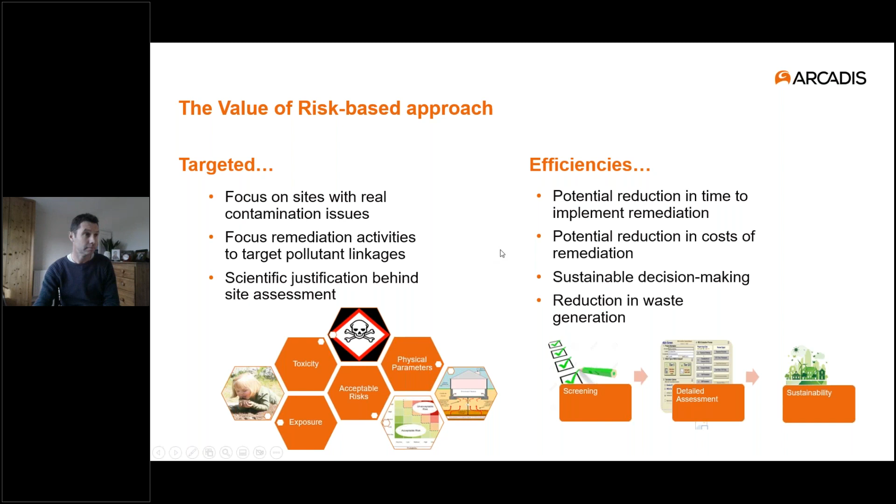I wanted to look now in a bit more detail at the risk assessment element of the process. So this determines the need for action, but also the pollutant linkages of concern for what action needs to be taken. It's an iterative process where we continually refine the conceptual site model. Sites may be screened out at any stage of the assessment process.

So the first stage is desk study, where we identify whether or not a contaminative source is present. We then move on to site investigation if the site was of sufficient concern. This may be where we take soil and groundwater data. The data we collect would be initially screened against generic assessment criteria, and that enables us to screen out the low risk sites.

For sites then requiring further assessment, we move on to the more detailed assessment stage, and sites coming out of that requiring more work, that is where we consider remedial options. With the risk assessment process, we would be targeting the pollutant linkages specifically in those remedial options. But there's always a case for considering the sustainability of any action to be taken, and then potentially to undertake further assessment to fully justify the remedial action.

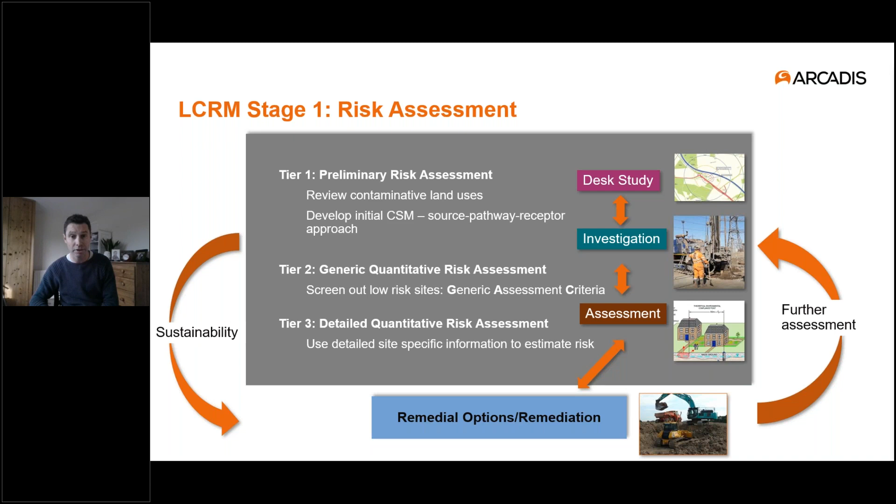So just moving on to the conceptual site model fundamentals. So the conceptual site model, also referred to as a source pathway receptor approach. So the first part obviously is a source, where we need to have a contaminant that has potential to cause harm. Then we have a pathway, which is a mechanism by which the contaminant can reach the receptor, and then a receptor, which is something that can be harmed by the contaminant. For a risk to be realized, all three elements need to be present.

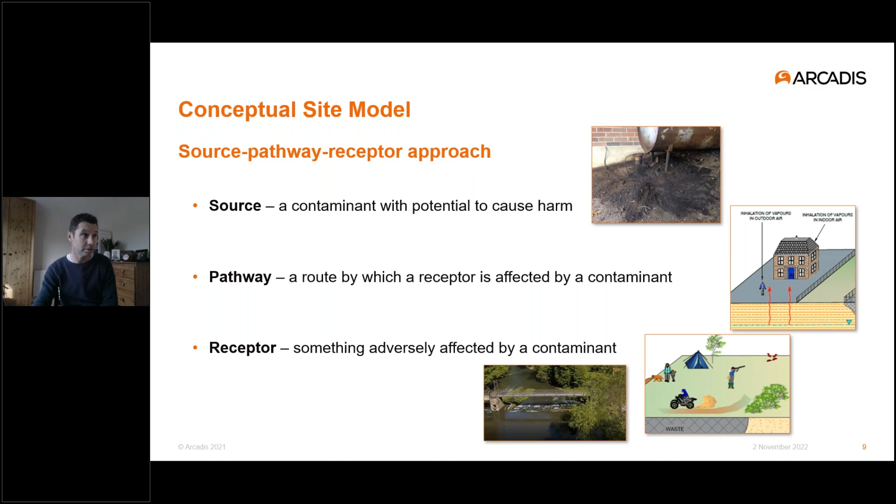So just have some examples of different sources here. A thing I wanted to talk about is the difference between point sources. It tends to be point sources that we identify in desk studies, but we also would have more diffuse sources. So something like pesticides, for example, widespread usage, so it could be considered a contaminant. However, if they're applied properly, they should degrade in the environment. So it would be more the point sources that we consider, so something like mixing points or storage areas.

Other examples of point sources we have here: fuel tank, animal waste storage. Buildings can be sources of contamination. So we'll be talking about asbestos in more detail later, and lead paint. We also have diffuse sources that could come from natural background in soils, also from human activities like burning of fossil fuels. Background issues are harder to deal with because often the benefit is less likely to be realised.

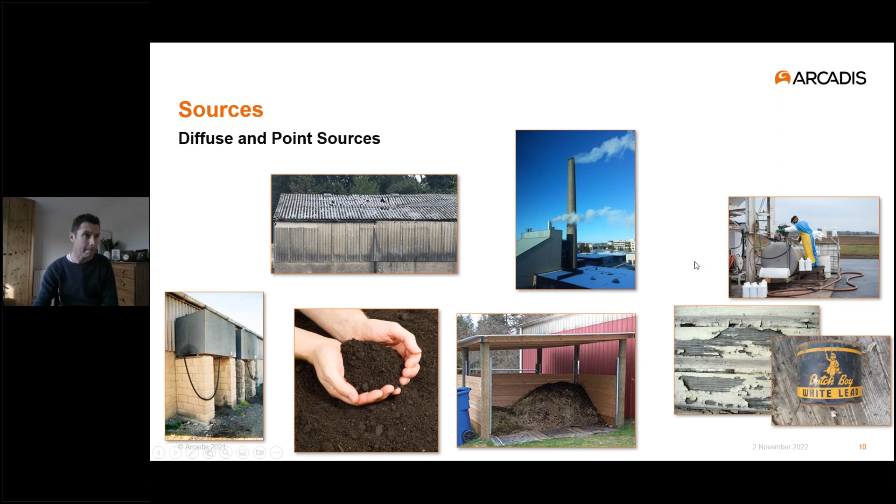Okay, and moving on to receptors. So there are three broad categories of receptors that we consider. So first of all, human health. Different end uses, different scenarios determine the type of receptor and the sensitivity. So for example, in a residential scenario, we may consider a child receptor, whereas a commercial setting may be an adult worker. Water resources. So this is where we consider aquifer resources, so that would be for drinking water or as a base flow for surface water. And also surface water, which would be either an ecological resource or drinking water.

And finally, ecological receptors. Now these tend to fall within water resource because it's often the water environment that's being affected. We tend to specifically consider it when it's designated sites. It would be a different scenario if the protected site was within our site. So then we might need to consider the soil quality.

So just to call out some of the human health exposure pathways. So these are the mechanisms by which harm can occur to people. The active pathways depend upon the scenarios or end uses for the site. Some pathways will be more important than others, and this depends on the end use scenario. So broadly speaking, the pathways we consider are dust inhalation and ingestion, vapor inhalation, dermal contact with soils, and consumption of produce.

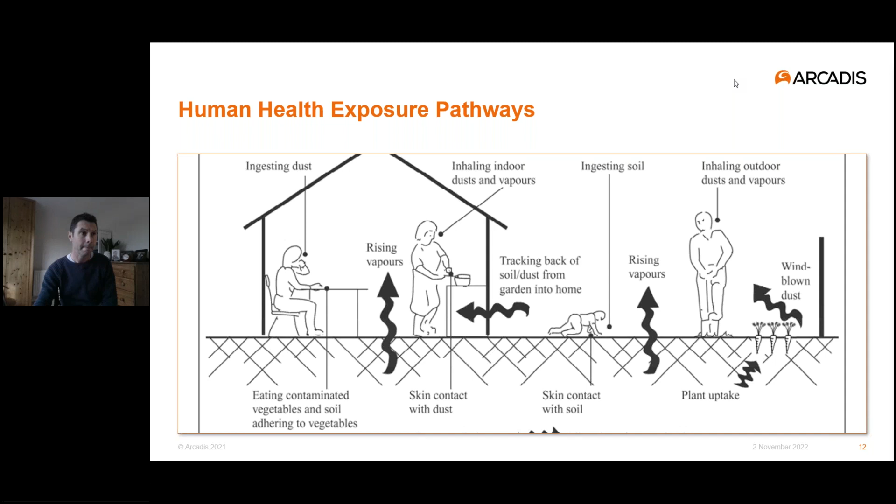Next, the pathways affecting water resource and ecology. So contaminated soil may leach into the aquifer. When an aquifer is then impacted, the contamination within the aquifer can laterally migrate towards surface water. Another pathway to consider would be direct runoff into a surface water feature. So these pathways will also be relevant to ecological receptors. Less commonly, we may have a situation like this shown, where we have deposition of waste material onto designated sites. So here we have a landfill that was being eroded onto a protected shoreline.

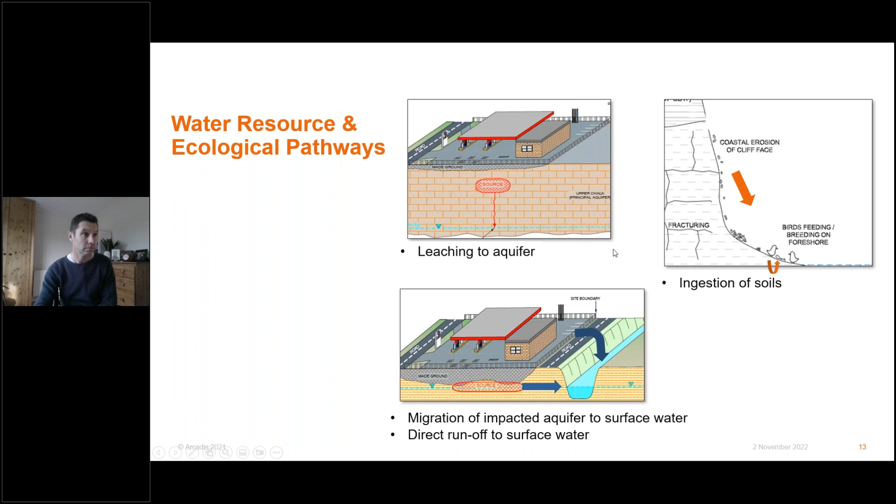Okay, so now we're moving on to look at some contaminants in more specific detail. So first of all, I thought it was useful to introduce some of the concepts of how contamination is held within soils. So contaminants may be associated with the organic matter within soils. They may be held dissolved within pore water, or they may be present as particulates. So metals and organic compounds are typically bound in quite different ways.

So how a contaminant is present in soil really depends on just how it got there. So something like a historical fuel leak may have been held within the soil matrix, whereas fragments from asbestos or from lead-based paint would be more dispersed as fragments throughout the soil.

Another thing to think about is just how the contaminant is dispersed across the site. So we may have an airborne source or a spill, and that would be a point source, and then lower concentrations coming out in a plume. But if we were dealing with an imported soil to the site, then we wouldn't see this effect, and it would potentially be more evenly distributed across the site.

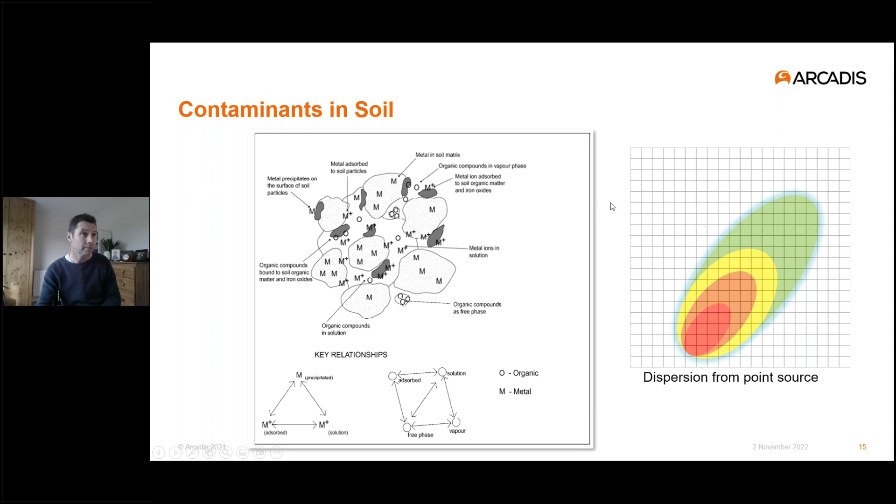So moving on to some examples. First of all, I wanted to talk about metals and the common example of lead. So lead has many industrial uses and sources. It is known to have effects on human health, including brain damage, and also ecotoxic effects. So in terms of sources, many metals, including lead, can accumulate from activities such as burning of materials or sewage sludge.

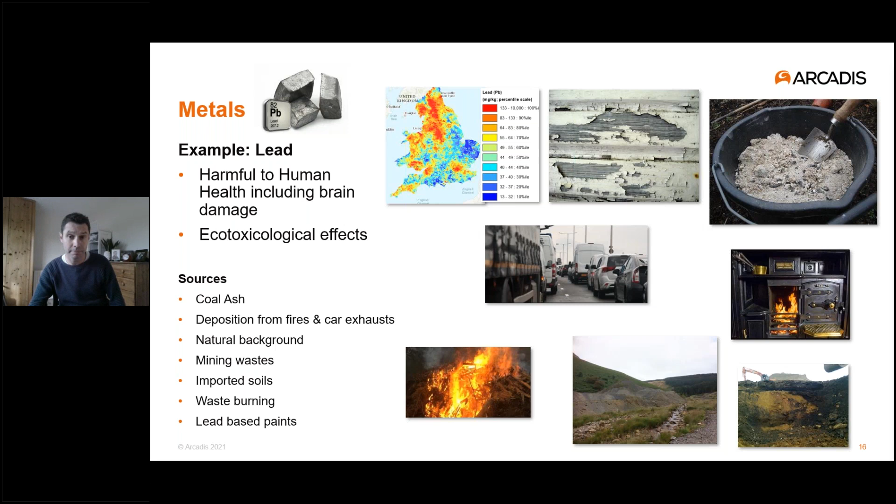I gave the example before of the point sources, so maybe lead-based paints. We may have airborne contamination from burning that could be dispersed over a large area, or more recently from traffic. Lead in particular, we have some areas of the country with particularly high background concentrations that may be above regional screening criteria. And of course, we always have the potential for imported nasties on site in reused soils.

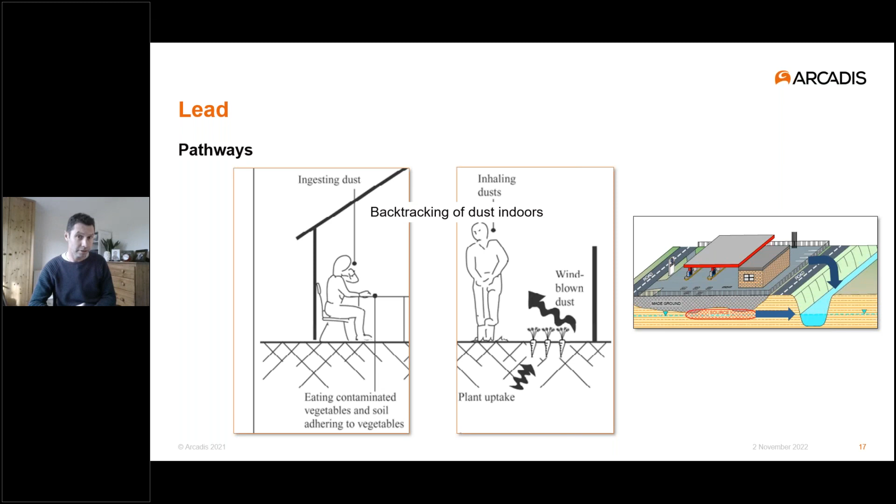So in terms of the pathways for lead and other metals, because it's not volatile, we're just considering the dust and dermal pathways and potentially getting into homegrown produce. So it's worth noting that there'll be no pathway present if the soil was covered. In terms of risk to water resources, there's a potential for leaching. This depends on the mobility of the species. And something like lead is often of quite low mobility, particularly something like the paint fragments example.

Next, I wanted to talk about hydrocarbons, and specifically polycyclic aromatic hydrocarbons, as they're very common and ubiquitous, associated with many human activities such as burning. Various sources, so from oils, from combustion products. We also have background concentrations relating to human activities. So these will typically be higher in urban and industrial settings, but we also have concentrations in agricultural settings from burning activities that occur there.

There are many hidden sources from our industrial past. So things like blacksmiths, hop kilns, lime kilns were widespread throughout the country. These could be point sources, but often we have reuse of the ash material associated with the burning, things like paths, fill material, or even added to soil. So PAHs can really get spread around, and again, are imported in soils to sites.

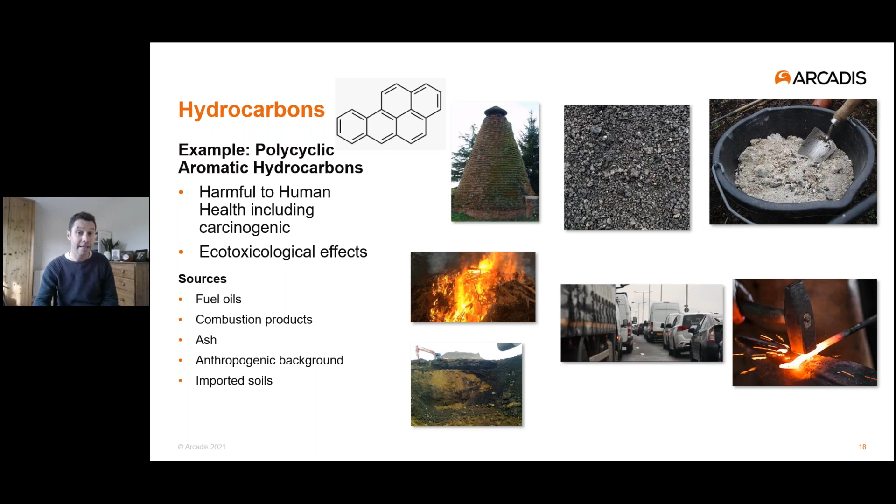In terms of pathways, it's similar to lead, but some PAHs also have some volatility, so the vapour pathway may also be active. They generally have very low environmental quality standards. So when we're assessing risk to water, we might want to think about general background quality as well.

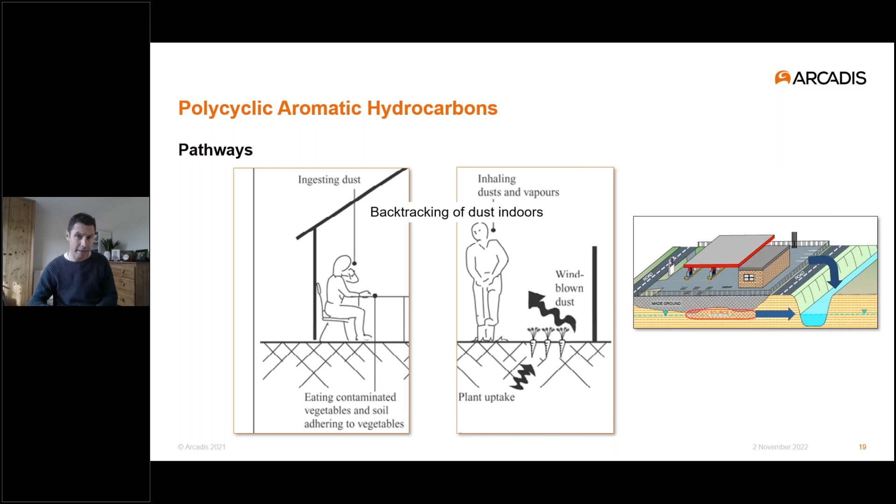Right, finally, moving on to asbestos. So asbestos, as you probably know, is something that's been heavily used during the 20th century. Final forms of asbestos were not banned until 1999. So it's quite widespread. Its properties of being fireproof and the fact that it doesn't rot have always made it an attractive building material. So asbestos is harmful to human health and it causes respiratory diseases.

I have some examples here of where asbestos may occur. So particularly building materials and insulation. Release from building materials would often be during demolition or maybe deterioration of those materials during weathering. Now, some asbestos-containing materials have a much higher potential to release fibres than others.

So some of the examples I have here, we've got asbestos floor tiles in the top right, a relatively low percentage of asbestos which is highly bound, and then below that we have a loose fibre fill, so there's a high fibre release, and somewhere between those we have the cement-bound asbestos form that we so commonly see. So again, with asbestos, there are often low background levels which are associated with human activities.

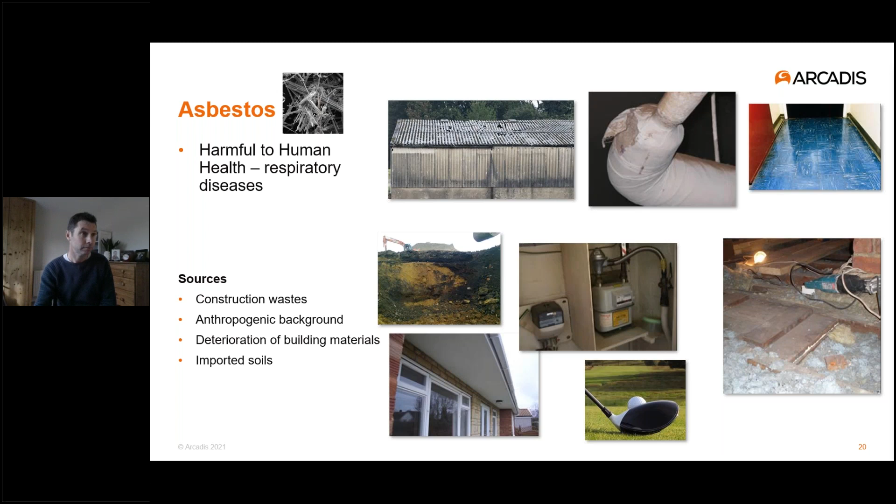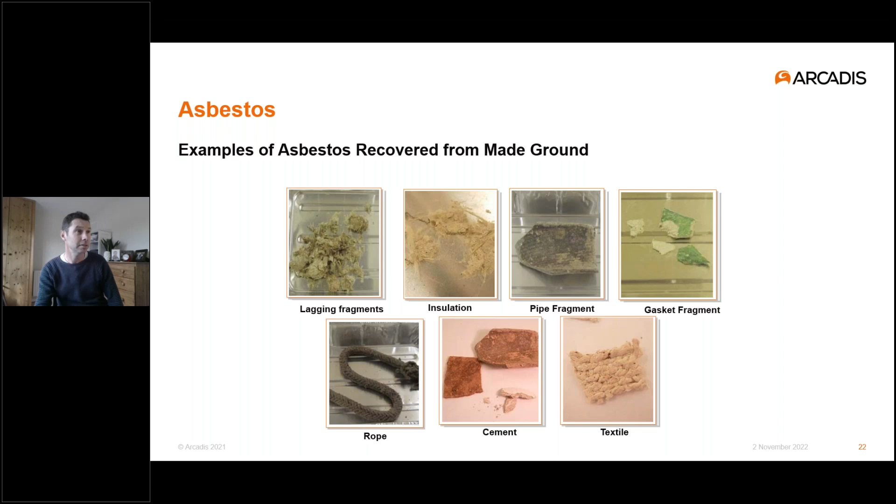So as far as exposure pathways go, it is only the inhalation of dust or ingestion of dust pathways that are relevant to asbestos. Here's some examples of where asbestos has been recovered from soils. So many different forms can be found. When an environmental consultant is assessing a site, we would identify suspected asbestos, and it would be confirmed by a specialist or laboratory.

I just wanted to give an overview of some of the mechanisms for asbestos release from soil. So in order for a risk to human health to be realised, asbestos fibres need to be airborne so that they can be inhaled. So if we're dealing with wet or clay soils, then the release potential from activities like wind disturbance or mechanical disturbance are much lower. However, for indoor risk, potentially wet and clay soils could stick to your shoes and get inside much more easily. So factors affecting the indoor pathway could be very much related to things like distance between the source and the property, and habits like whether you take your shoes off or how much you vacuum.

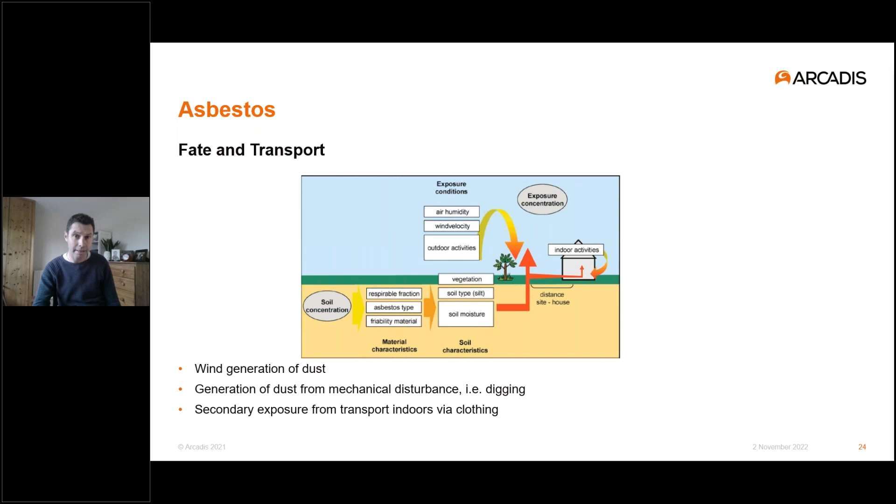Okay, so just to wrap things up, we've identified that there are many sources of contaminants that can be widespread in their presence, and they have the potential to cause harm. We've looked at a few of them in more detail. However, we know that we have a risk-based framework, and using screening tools like screening criteria that can help us to manage the risk and take appropriate action. For potentially contaminated sites, an environmental consultancy can help assess the risks and determine what action needs to be done and what the most appropriate action is.

So for example, a site may have contamination, but it may not need to be remediated. We may not need to remediate the entire site, and we may only need to consider specific pollutant linkages of concern. So I haven't covered remediation here as a topic specifically. It's a very wide-ranging topic. For us, I think there's interesting implications with soil quality. So following remediation, how much of a resource value could remain for a soil. So hopefully there'll be some interesting synergies there.

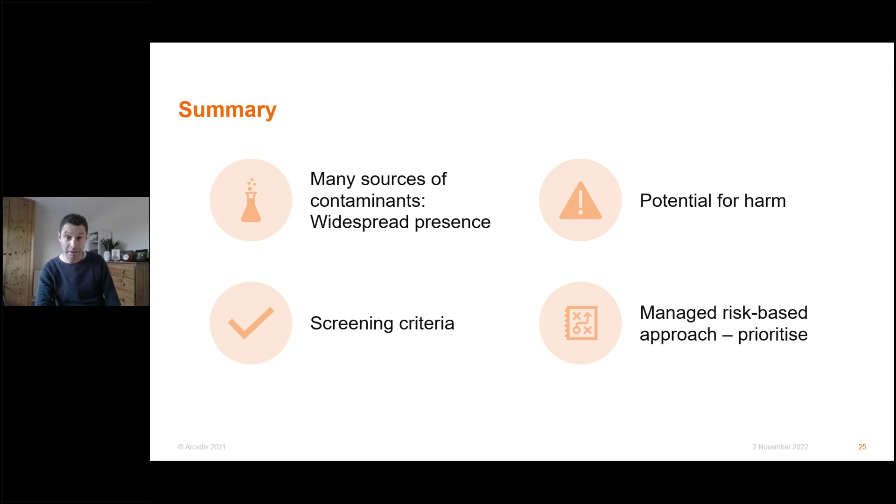And our next speaker will be Stewart Powell. So Stewart Powell started working with asbestos in 1999 as a technical manager for a licensed asbestos removal contractor with responsibilities including health, safety and quality. He's currently the head of compliance for John F. Hunt Environmental and part of the SHEQ team that advises and supports a national multi-service subcontractor that employs over 1,500 personnel. Other responsibilities include developing standard operating procedures for all asbestos-related activities, audit schemes, and training courses for the safe removal and disposal of asbestos. In recent months, after a HSE asbestos licensing review, he was able to secure a 3-year extension to the current HSE licence.

Stewart is also the current chairman of the SHEQ Asbestos Working Group, which helps support over 100 health and safety professionals that work with asbestos. He's been a frequent speaker for the HSE Working Well Together campaign and the UK trade and industry for all subjects relating to safe management, removal and disposal of asbestos. Stewart is the author of aspirational guidance notes and handbooks for the asbestos removal industry best practice. So over to you, Stewart.

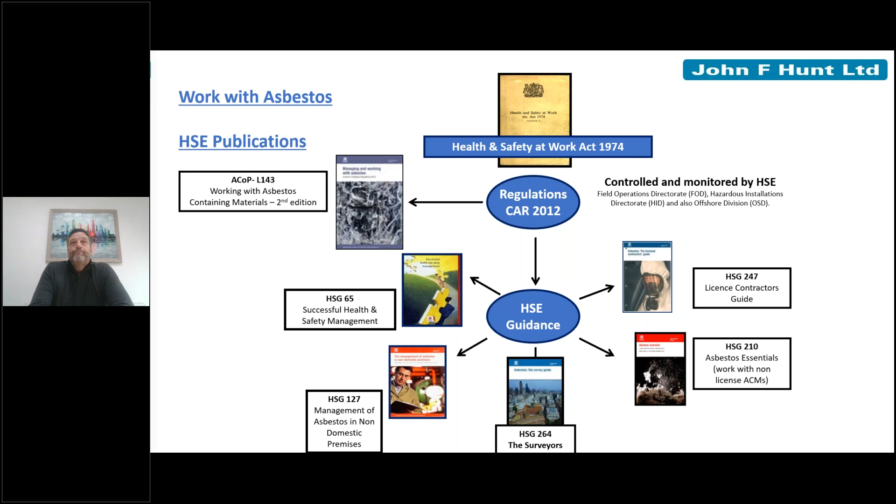So back to the Control of Asbestos Regulations and the control limits. As I mentioned before, any work which is likely to exceed 0.1 would automatically become licensable. So licensable asbestos removal, including contaminated in the ground, the materials would really consist of spray coatings, laggings, gaskets, generally insulation materials. So we're strictly bound by the HSE to notify work 14 days before it's likely to be undertaken. And the purpose behind this is so the HSE can monitor work which represents the greatest risk and also plan for a potential site visit.

Now, when we consider work which doesn't necessarily fall under the licensing regime, we often refer to these as non-licensed asbestos materials. And when you consider that probably about 80% of the asbestos materials out there today are probably non-licensed, such as cement materials, Artex, floor tiles, gaskets. Although we have to have very strict controls in how we're removing these materials, we don't necessarily have to notify 14 days before, although in some cases notification is mandatory, but we can do this on the same day or maybe a couple of days before the work is due to take place.

And how do we actually get fibres per centimetre cubed? Well, it's the concentrations of asbestos in the air which is measured over a 4-hour period.

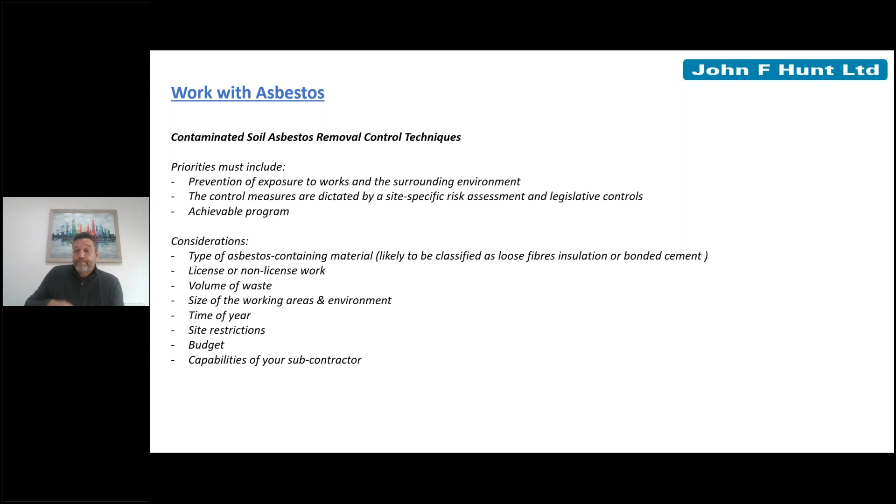So, as I mentioned before, there are different variations of asbestos materials which I found over the years. One control technique, which is very frequently found, would be setting up a respirator zone. These will be targeted areas where asbestos is going to be disturbed in the soil. We also must include personal decontamination areas, the use of a decontamination unit or of a preliminary clean-down area. Plant and equipment also must be cleaned very thoroughly and completely decontaminated before it leaves the site. This also would include excavators and any other heavy machinery which is used to take soil away. We also have to consider adequate RPE and PPE for all site personnel that enter the respirator zone. This would also include maybe a machine driver who is operating a digger or any mechanical machine.

They would also have to wear the appropriate RPE, which is quite often a half-face oronasal mask with a P3 filter. Air monitoring we also have to consider, because although the air monitoring quite often is not really that conclusive, we have to also monitor the variations of asbestos in the air at any time. And these could be placed around the respirator zones and also inside of the respirator zone and the surrounding areas. The removal method: excavating the soil, machinery will also be used for picking up bonded materials. I'll go into a little bit more detail about the different types of operational works. And also, what's very important is that the suppression methods are a key element. In other words, wetting of the asbestos-containing materials and surrounding areas is something which has to be planned and executed on a regular and daily basis.

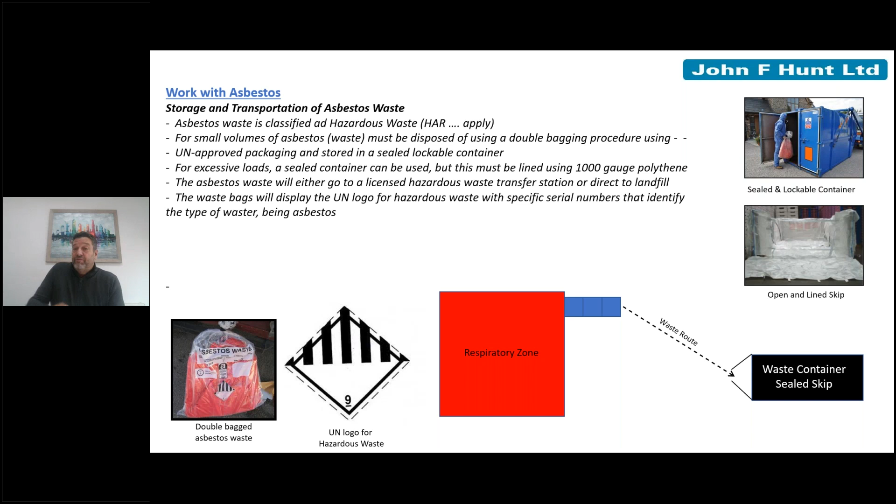Okay, so if I can just go back to the different types and variations in the techniques we have of removing asbestos. Suppression is also, I would say, a key fundamental point. And also, if we are removing asbestos soil during the summer months when it is rather dry, then suppression techniques have to be adopted at all times. These are usually spray-on machines, which we often find.

Also, there were areas where, if the material was quite commonly found, then capping of that waste can also be considered. When we actually undertake this task, we would install a rubber membrane which separates the contaminated waste from the new ground. This is quite often a method which is used by developers, but unfortunately the land will still have to be treated and deemed to be contaminated.

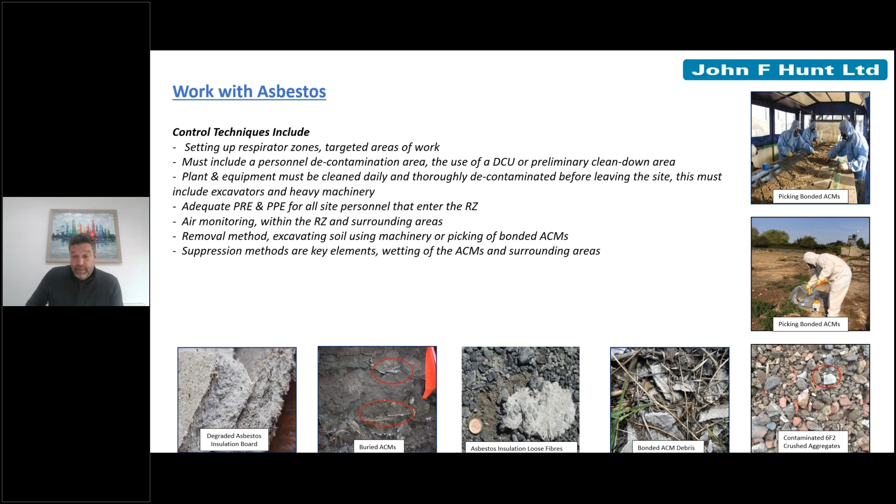Okay, that concludes my talk for this. If there's any questions at all, I'd open the floor to any interesting questions you may have. Thank you.